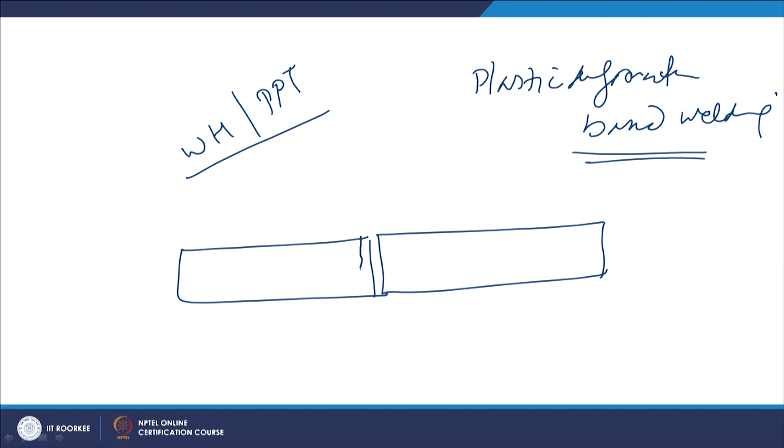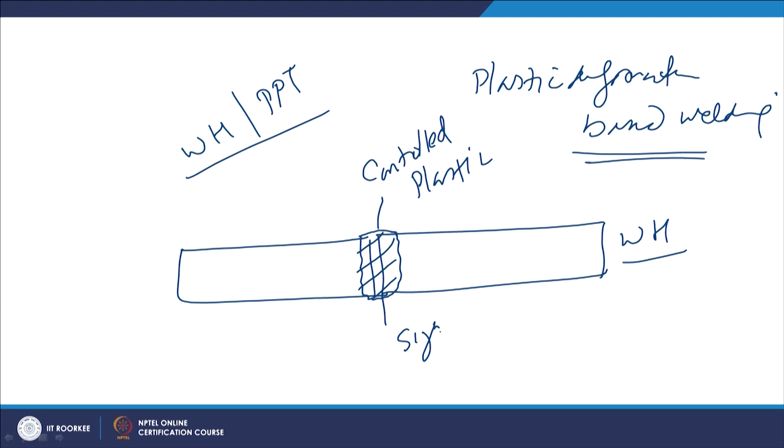If we see the work hardenable metal systems, controlled plastic deformation of the faying surfaces is used for developing metallurgical continuity, so that a joint is made. This controlled plastic deformation in case of work hardenable metal systems causes work hardening, and so a significant increase in strength as well as hardness takes place in the region of the weld joint.

While away from the weld joint, in the heat affected zone, if heat is being generated due to the plastic deformation in course of the welding process, this will lead to recovery and loss of work hardening effect, and this loss of work hardening effect causes the reduction in hardness and reduction in yield strength.

So the typical pattern of hardness variation observed in this case is: in the base metal hardness is high, but as we approach the heat affected zone hardness is reduced, and as soon as we reach the weld zone, hardness is increased again.

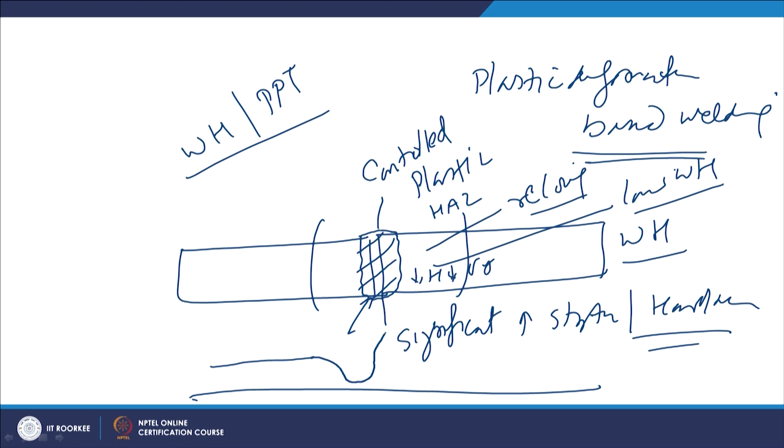This increase in hardness in the weld zone is attributed to the plastic deformation and related work hardening effect, while in the zone next to the weld metal, that is the heat affected zone, the softening or reduction in hardness is occurring primarily due to the recovery and loss of dislocations, which is taking place due to the heat generated during the plastic deformation based welding processes.

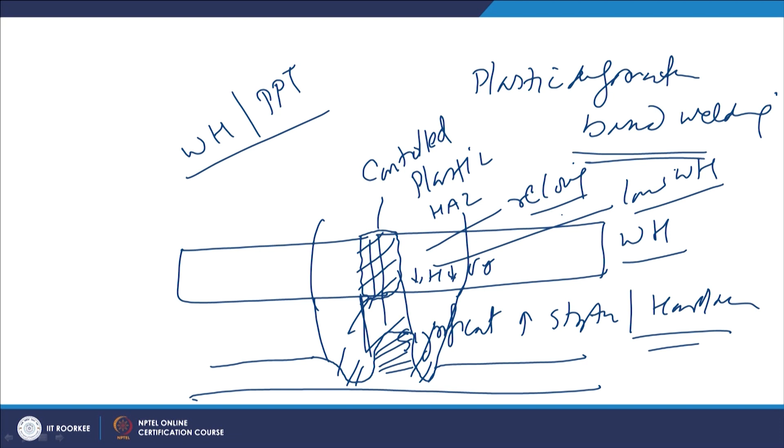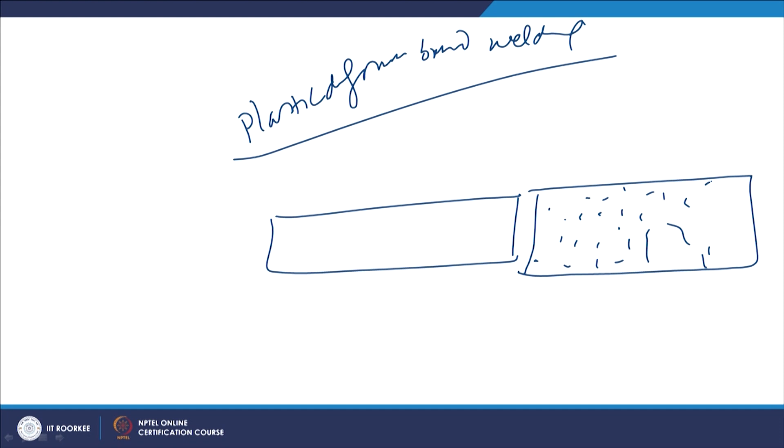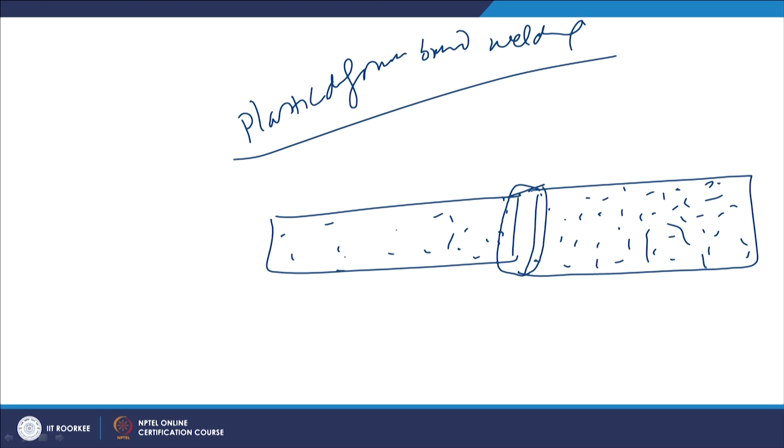On the other hand, if we talk about plastic deformation based welding processes of precipitation hardenable metals, where the presence of these precipitates is contributing significantly towards the increase in strength, then as per the response of the metal, the zone next to the faying surfaces of the components, which are subjected to controlled plastic deformation for metallic continuity to develop the weld joint, this zone which is severely deformed during the welding process experiences complete loss

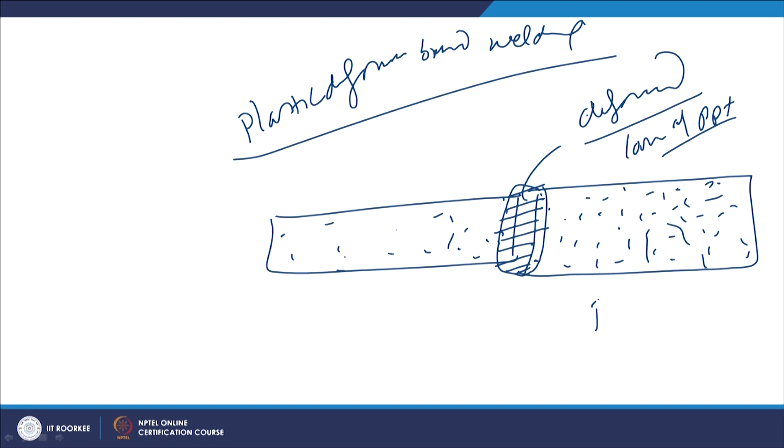of precipitates, primarily due to the fracturing of all such precipitates. So basically we get a solid solution through the complete dissolution of the precipitates, while partial dissolution due to the heat being generated during the plastic deformation based welding process can lead to partial dissolution in the heat affected zone on both sides.

So in this case, complete dissolution is taking place in the weld metal due to the fracturing and complete reversion of the precipitates, while partial dissolution or partial loss of precipitates is taking place in the heat affected zone. So if we try to understand this with respect to the hardness variation,

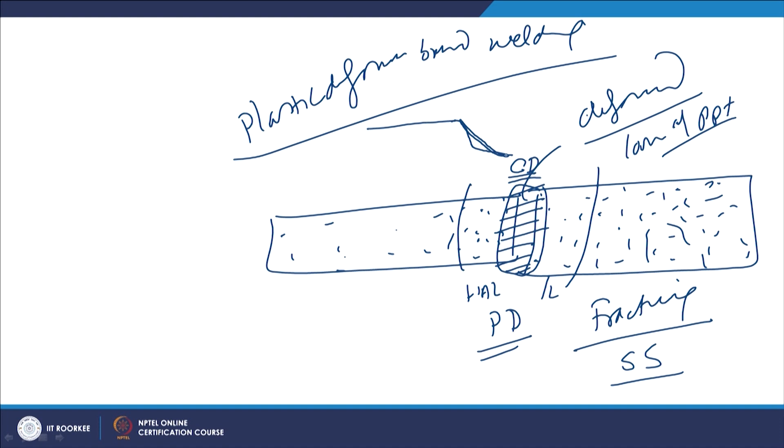then we will see that hardness in the base metal is high, but as we approach the heat affected zone, there will be a gradual loss of hardness, and the minimum hardness will be shown by the weld metal, where complete dissolution of the precipitates has taken place.

On the other hand, a gradual increase in hardness will take place in the heat affected zone, where gradually means partial loss of the precipitate is taking place. So wherever there is a gradient, that will be a zone where either increasing amount of precipitates is present, or a decreasing amount of precipitates is present.

The maximum precipitate density will be here in the base metal, and then it will keep on decreasing gradually as we approach towards the weld metal, causing a gradual reduction in hardness. So minimum hardness will be shown by the weld metal, then increasing hardness will be shown by the heat affected zone on both sides, and then the maximum hardness in the base metal.

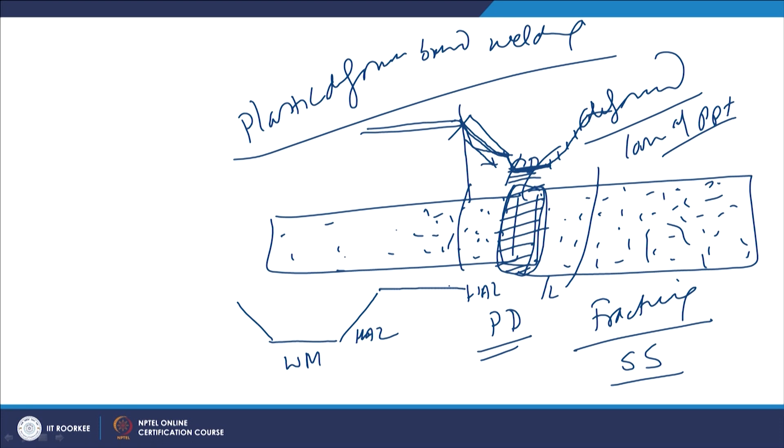So this reduction in the hardness in the heat affected zone is due to the partial dissolution, while in the weld metal minimum hardness is attributed to the complete dissolution or complete reversion of the precipitates. So these are the completely different aspects from the weldability point of view of the work hardenable and precipitation hardenable metal systems.

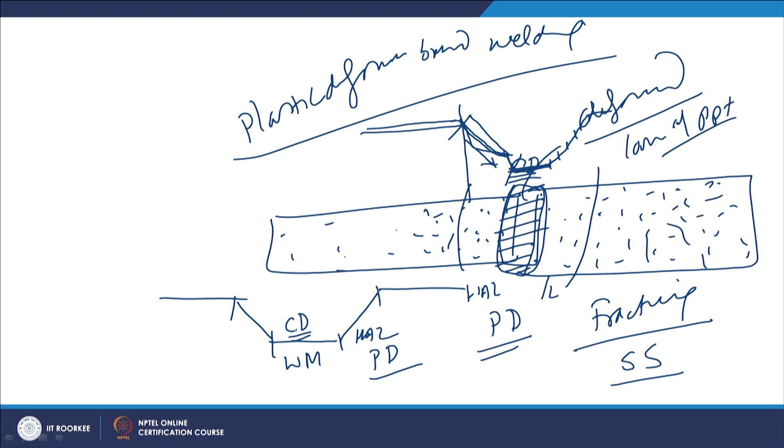Now we will see the way by which the metal is strengthened by the grain refinement, dispersion hardening, and transformation hardening when they are subjected to welding by the fusion welding or by solid state welding process, like those which will be involving the plastic deformation.

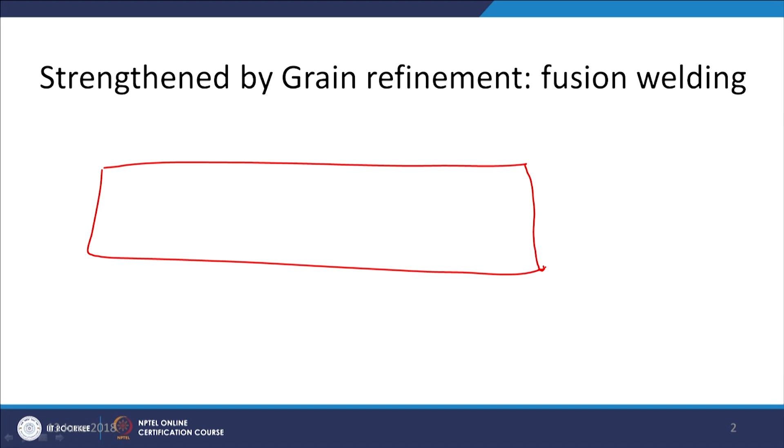Like say, the metal system which is primarily strengthened by the grain refinement, no other mechanism is working in any way. So the component is like this, and when subjected to welding through the application of heat, the zone will be brought to the molten state, and in this process this zone will not be having any effect of the prior grain refinement.

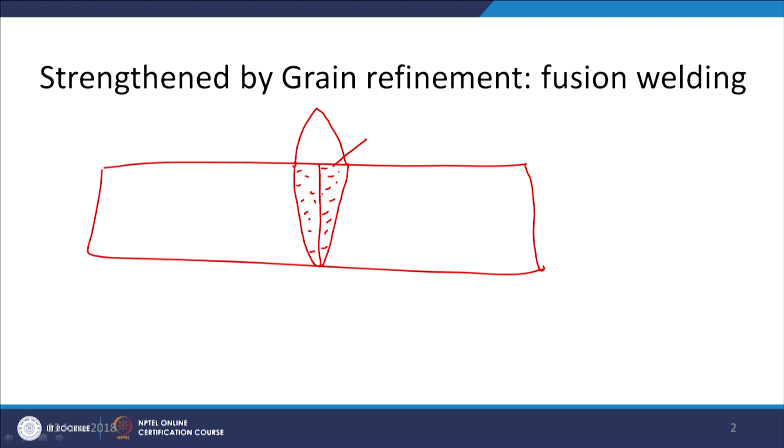Because the grain structure here will be completely dendritic, and the size of the grain will be governed by the cooling rate experienced by the weld metal during the welding, which in turn will depend upon the heat input which is being given.

If the heat input is high, like in the case of the GTAW process, then the grains will be coarse. And if it is the laser welding process where heat input is very less, the grains will be extremely fine and they will be well distributed.

So since it is an as-cast structure, the dendrites are very coarse for the gas tungsten arc welding, while in case of the laser welding these will be very fine in case of the dendritic structure.

Now apart from the formation of the dendritic structure or the cellular structure in the weld metal, part of the heat will also be transferred to the base metal, and it will be developing the heat affected zone on both sides. Since this kind of metal system has been strengthened by the grain refinement, the grain size is fine.

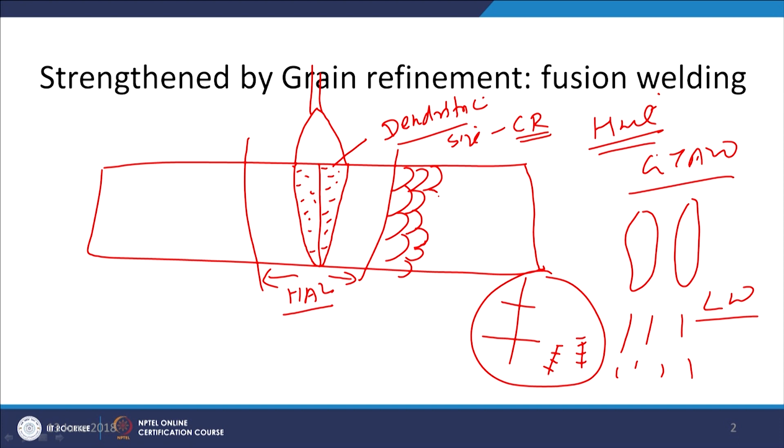And we know all kinds of metal systems, when they are exposed to high temperature, the metal tends to attain the larger grain size, so that the associated surface energy can be reduced.

So the zone which is experiencing the effect of heat of the fusion welding, that will be subjected to grain coarsening, because through the grain coarsening the surface energy associated with that particular metal will be reduced.

So all the grains tend to get coarsened, so that the associated energy can be reduced through the reduction in the grain boundary area, while in case when the grain size is fine, the grain boundary is more, and the associated surface energy is more.

So it is very simple that whenever heat is supplied, the grains tend to grow, and that will depend upon the kind of weld thermal cycle experienced by the heat affected zone.

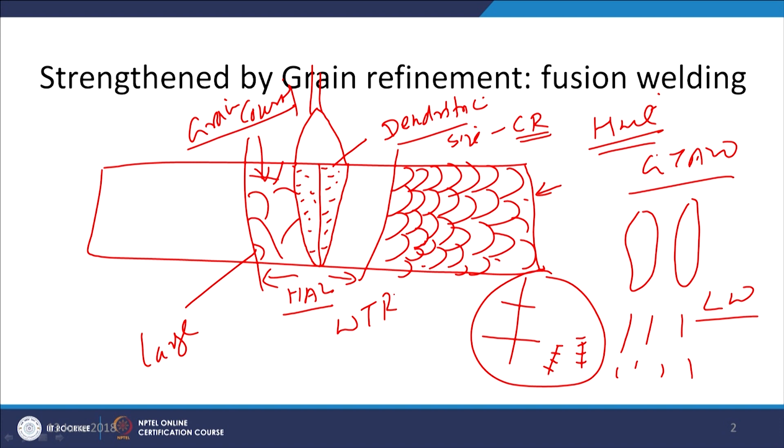So if we take an example like this: this is the weld metal, this is one zone, this is another zone, with increasing distance from the fusion boundary. So the weld thermal cycle of each zone will be experiencing a different thermal cycle.

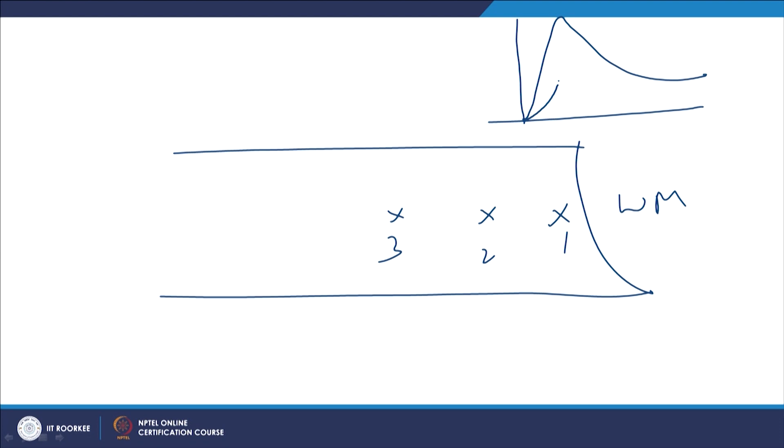Peak temperature will be maximum for location 1, and then peak temperature will be somewhat lower for location 2, and further lower for location 3.

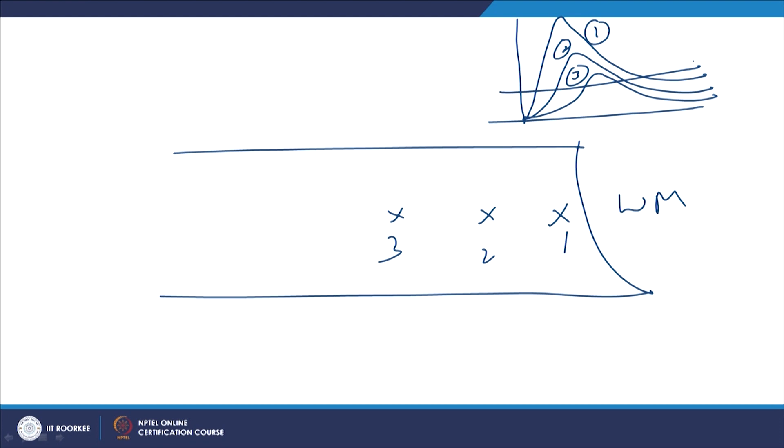So if we take up any particular temperature above which recrystallization is taking place and then grain growth is occurring, for location 1 the peak temperature will be high, as well as high temperature retention will also be high.

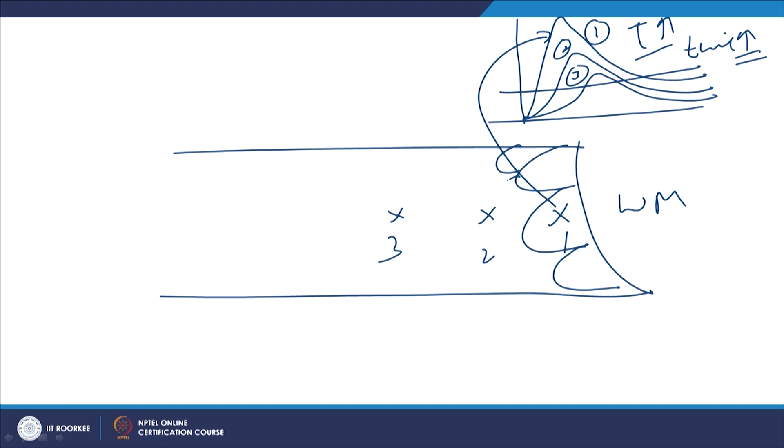And both these factors will be promoting the maximum grain growth in location 1, while somewhat lesser grain growth will be occurring in location 2.

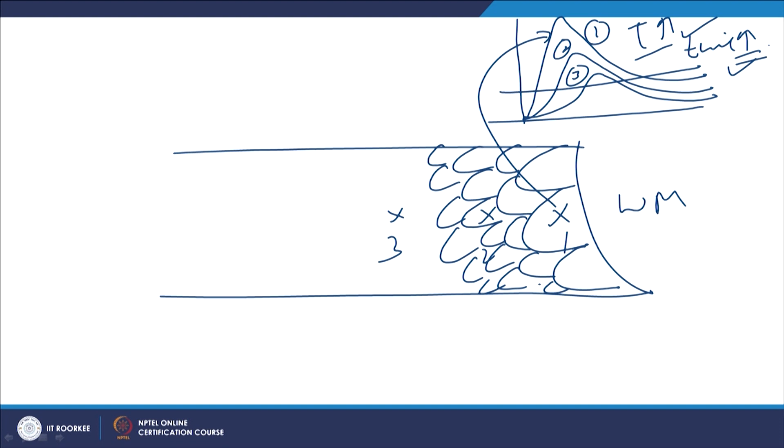So the regions which are experiencing the maximum grain coarsening, these will be experiencing the higher peak temperature for longer time, and so the regions which have experienced the maximum

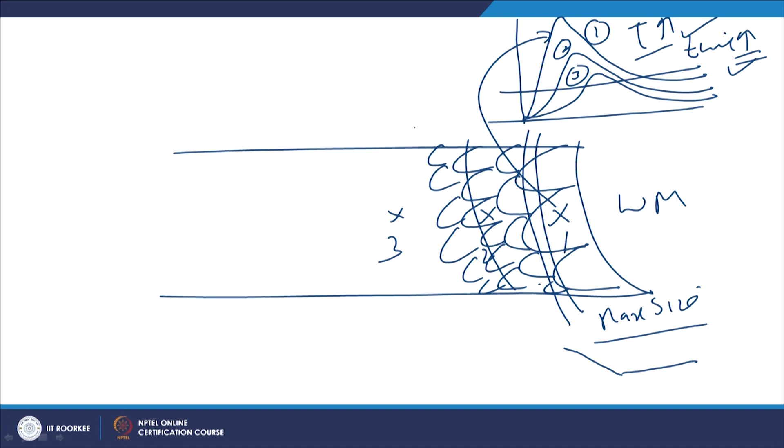size of grain, that will be the softest one. Where partial grain coarsening has taken place, the hardness will be somewhat high, and where grains are still fine, that zone will be having the higher hardness.

So if we plot the hardness variation for the weld metal, for the weld joint of the metal strengthened by the grain refinement, in that case the weld metal will have the strength corresponding to its dendritic size. But in case of the heat affected zone, the area next to the fusion boundary will be coarser, then somewhat finer slightly away from the fusion boundary.

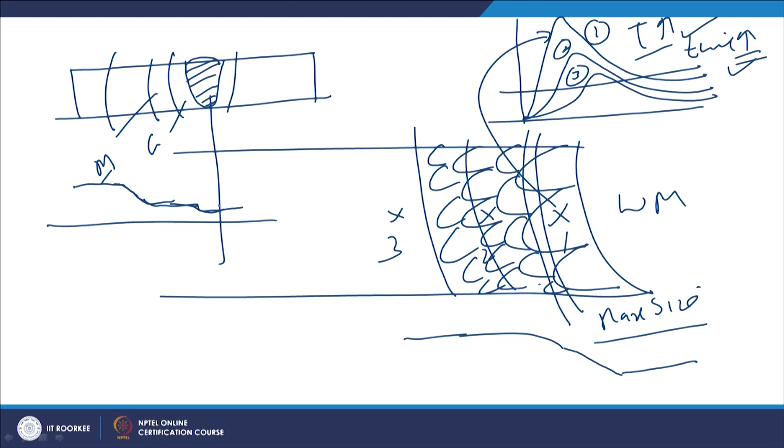This will be somewhat medium grain size, and fine grain size further away from the fusion boundary, and this effect will simply reflect in the hardness variation. If this hardness variation is plotted, then maximum hardness is in the base metal, somewhat lower hardness in the slightly coarsened grains, and a further lower hardness in the very coarse grains, then the base and weld metal. So this reduction in hardness in the heat affected zone is primarily attributed to grain coarsening.

As far as the weld metal is concerned, in general the weld metal also shows a lot of variation in grain size. The finest grains are observed at the center of the weld, and the maximum grain size is observed at the fusion boundary. So coarse grain size at the fusion boundary, fine grain size at the weld center, and medium grain sizes will be available in between.

So again there will be variation in hardness in the weld metal itself like this - maximum hardness at the center and then reducing hardness up to the fusion boundary, and this is also attributed to the changing grain sizes.

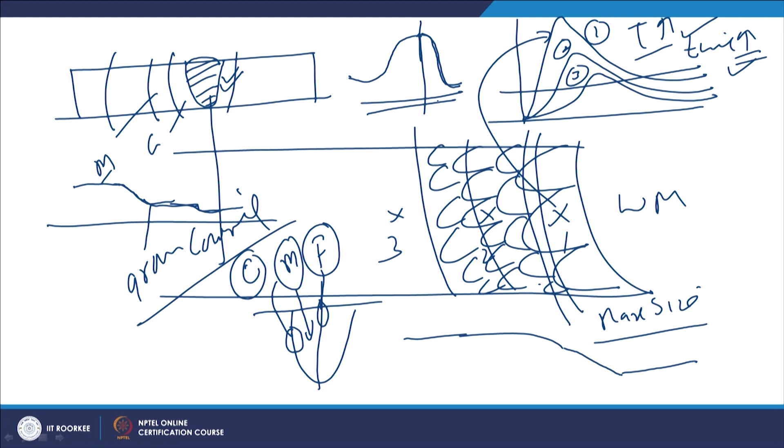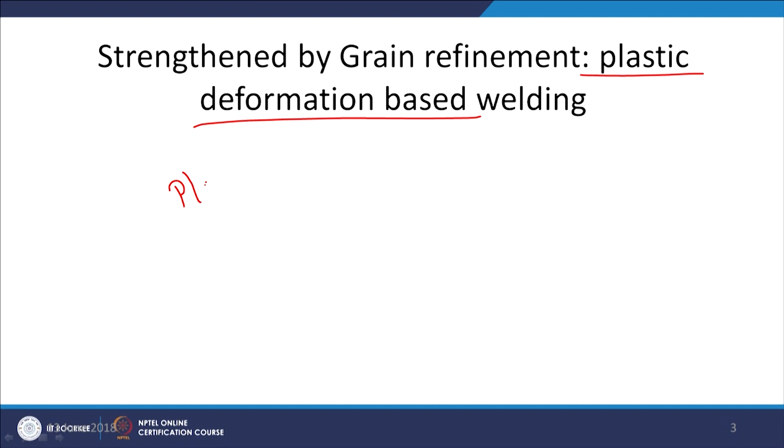Now we will see when the metal system strengthened by grain refinement is subjected to welding through the plastic deformation approach. Whenever material is subjected to severe plastic deformation for development of the joint, a lot of fracturing of the grains is involved, which in turn lowers the grain size, and a reduction in grain size increases the yield strength and also increases the hardness of the metal.

So while if heat is generated during the plastic deformation, it will certainly cause coarsening of the grains in the heat affected zone. So what we may notice is that the weld zone is very fine due to fracturing of the grains and constituents, while the weld heat affected zone is coarser, and the base metal is again finer because it has been strengthened by grain refinement. So fine grain size in the base metal, coarse grain size in the heat affected zone, and very fine grain size in the weld metal.

So we may find a situation where the base metal is retaining its hardness, loss of hardness is taking place in the heat affected zone due to coarsening, and then again higher strength is realized due to the fracturing and refinement of the grain in the weld zone. So we may find a trend of variation in hardness like this - the weld zone having higher hardness primarily due to grain refinement.

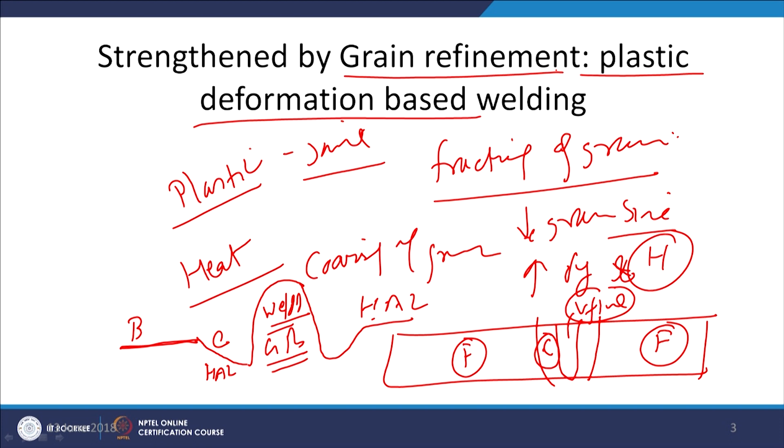Now if we take the dispersion strengthened metal system - dispersion strengthened metal systems, this mechanism is primarily used for developing composites. Meaning metal A is not having the desired characteristics, so another constituent is brought in and incorporated with A, so that the required combination of properties can be realized to achieve a particular purpose.

So in this case both A and B materials retain their identity, like matrix A is reinforced with constituent B in the matrix like this, in order to achieve the desired combination of properties which otherwise cannot be realized through any of these constituents individually. This approach of reinforcing the constituents in the matrix to achieve the required combination of properties applies when such kind of systems are joined.

A typical example of this - in aluminum we are reinforcing like TiB2, Al2O3, or silicon carbide. All these are refractory items being reinforced in the aluminum matrix. Likewise, we may use nickel, cobalt, or even iron to reinforce such kind of constituents.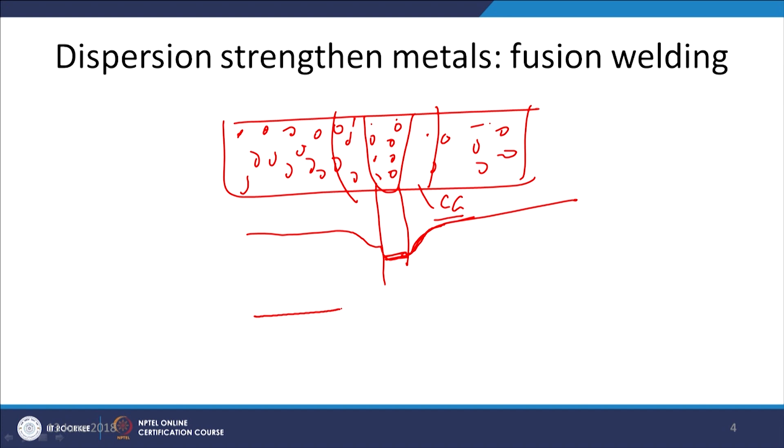So there can be soft zone formation in the heat affected zone as well as the weld zone, and then gradually increasing hardness on the other side. This is how we can understand the weld zone, HAZ on both sides, and then the base metal. This is how dispersion strengthened metals can behave.

Now, depending upon the kind of metal matrix, it may respond in different ways to the weld thermal cycle. Say if the reinforcing agent has been incorporated in steel, which also responds to transformation hardening, then there may be a significant increase in hardness of the heat affected zone due to transformation hardening. But if it is simply strengthened by grain refinement, then grain coarsening will lead to softening in the heat affected zone.

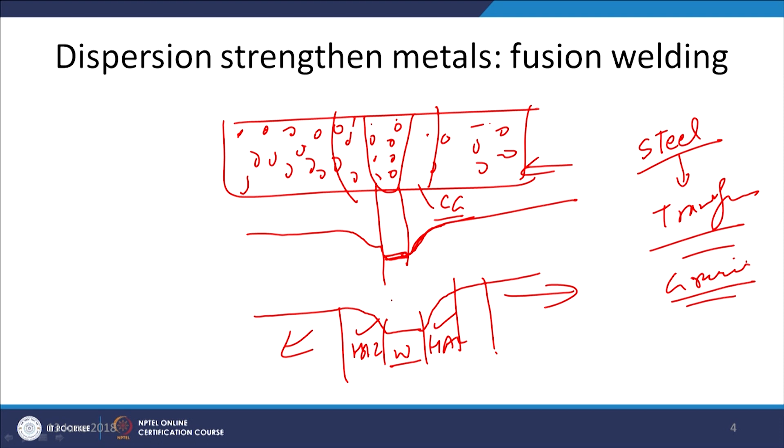Now we will see when the plastic deformation based approach is used for developing weld joints of composite materials. In that case, what will happen - we will try to see the composite material, or the metal strengthened by dispersion hardening through a suitable reinforcing agent, when such a metal system is subjected to plastic deformation for developing the weld joint.

So the severe plastic deformation in the region next to the faying surfaces will lead to fracturing of the reinforcing agent, and these particles reinforced in the metal matrix may get refined and achieve firm consolidation in the metal matrix, and this favorable variation in properties may lead to improvement in hardness.

On the other hand, heat generated during the plastic deformation based welding process may cause coarsening of the grains in the heat affected zone. So we will have the base metal with high hardness, somewhat lower hardness in the heat affected zone due to grain coarsening, and thereafter further higher hardness in the weld zone due to refinement of the reinforcing agent and firm consolidation of the metal matrix with the refined particles.

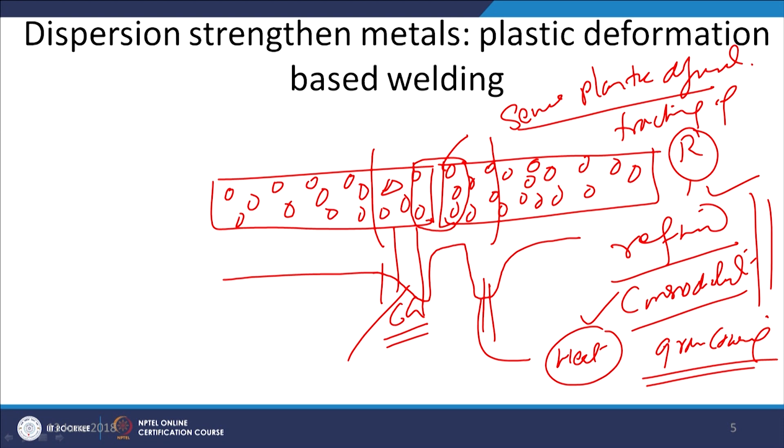As per the behavior of the metal system, the responses will be different. For instance, if the dispersion strengthened metal system is work hardenable, like aluminum magnesium manganese alloy, this is a 5000 series aluminum alloy, a work hardenable metal system which has been strengthened by reinforcement of second phase particles.

When such a metal system is subjected to welding by plastic deformation, the plastic deformation in the weld zone causes work hardening, and at the same time refinement of such reinforced particles due to fracturing and breaking, leading to further improvement in properties.

So the fine reinforcing agent and work hardened metal matrix both contribute to a significant increase in hardness. This gives much higher hardness in the weld metal, then somewhat lower hardness in the heat affected zone due to grain coarsening, and then a rise again in the hardness of the base metal. This increase in hardness is primarily attributed to the base metal, where particles are reinforced in the metal matrix.

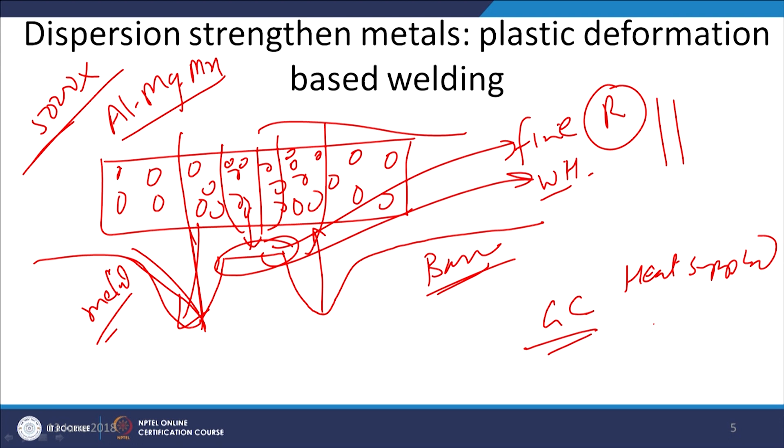Now we will see another metal system: the transformation strengthened metal system, meaning the metal shows different types of phases with a change of processing conditions. These processing conditions may be thermal processing or mechanical processing. So metal in normal condition may be having soft phases.

Like ferrite and pearlite in simple low carbon steel, which are softer ones, offering somewhat low yield strength and low hardness. But when these are processed either by thermal processing or mechanical processing, these lead to a change of phases from ferrite and pearlite.

It may get changed into bainite or martensite. Formation or transformation of such kind of phases leads to an increase in yield strength and hardness. There are various metal systems which show this kind of behavior, and this is exploited to strengthen the metal system, achieving the required strength through transformation from soft phases to hard phases.

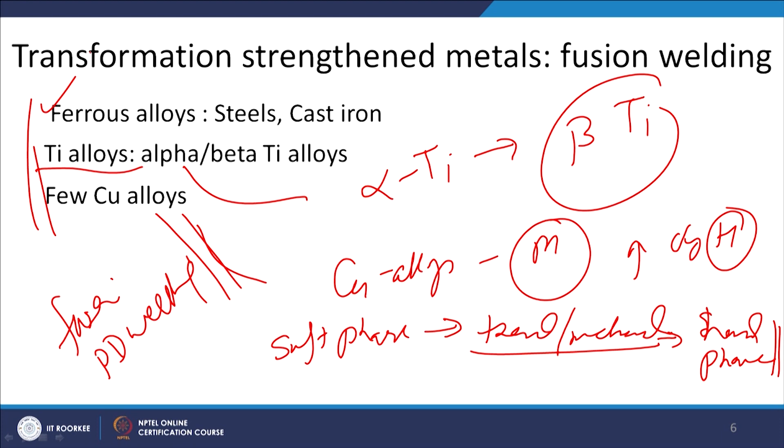So I will summarize this presentation. In this presentation, basically I have talked about the way precipitation strengthened metal systems, metals strengthened by grain refinement, and metals strengthened by dispersion hardening will respond to fusion welding and plastic deformation based welding processes, and the way there will be variation in the properties of such metal systems with the application of fusion welding and plastic deformation based welding process.